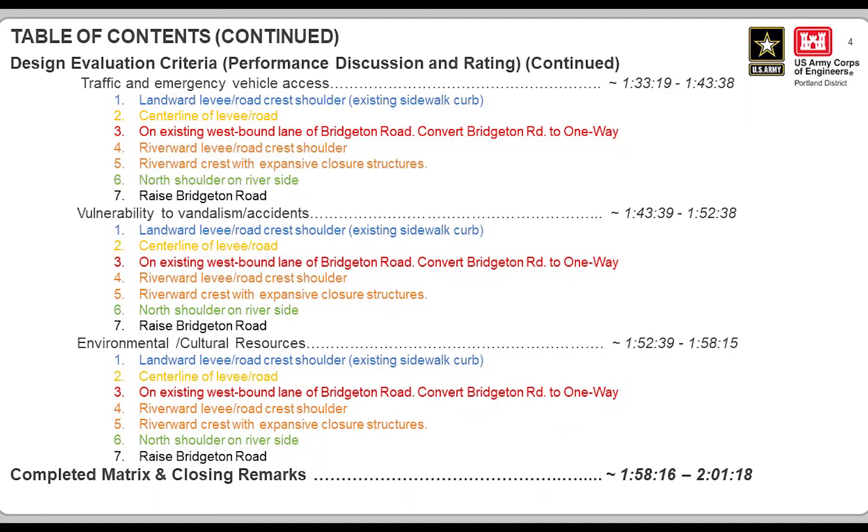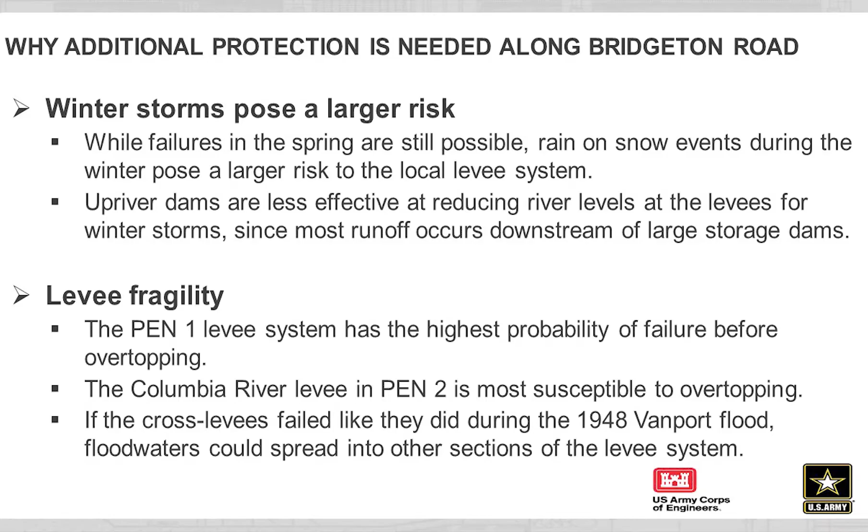Because of the social distancing restrictions we're currently all under, the Corps and MCDD are trying something different to reach out to you. We've put together this video presentation to update the public on what we've been looking at in the way of refinements to the Portland Metro Levee System alignment, specifically along Bridgeton Road.

As you know, the Portland Metro Levee System provides flood risk reduction to a leveed area with over 30,000 people living and working in the area and over $7 billion in property value.

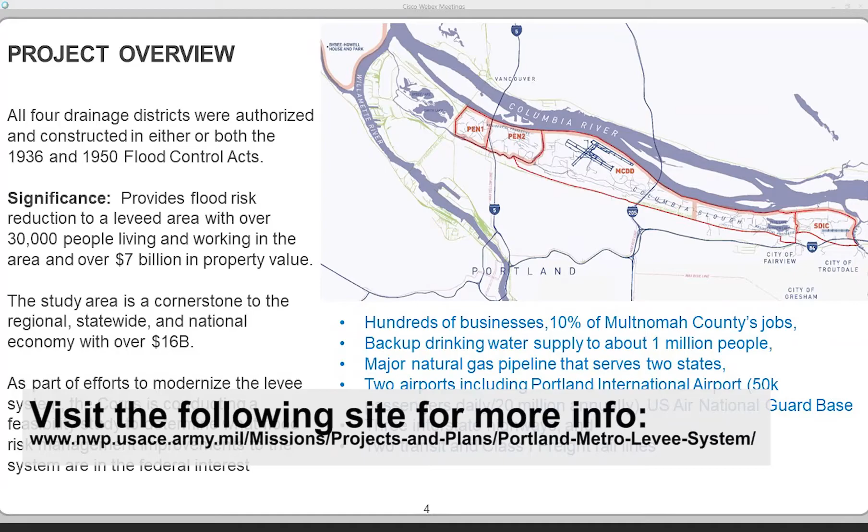As part of the effort to modernize the levee system, the Corps is conducting a feasibility study to determine what flood risk management improvements to the system are in the federal interest.

With the majority of the residents in the protected area living in Pen 2, the Bridgeton Road protection is an important feature to the residents immediately adjacent to the levee, but also very important to the residents that live in the low-lying areas of Pen 2.

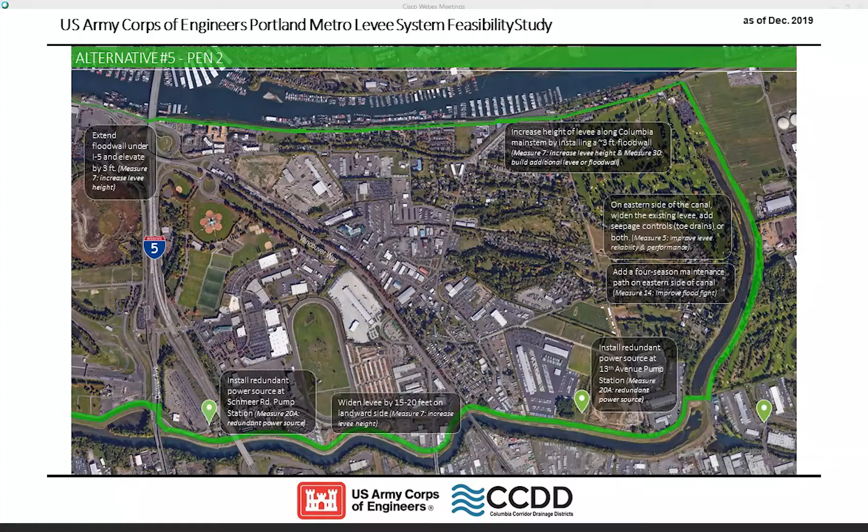To review what we've completed so far, the Corps has circulated the feasibility report and environmental assessment for public review and comment. We did that in January and early February of this year. We had identified the tentatively selected plan as Alternative 5.

On April 15, 2020, we conducted the agency decision milestone, where we received approval from our division headquarters to continue refining Alternative 5. On April 28th, the Corps and MCDD held a virtual meeting with the Bridgeton Neighborhood Association Board and committed to update the entire Bridgeton neighborhood on the refinements of the alignments along Bridgeton Road.

It was specifically requested for us to reach out prior to the Corps decision on the refined alignments.

What we'll be doing now is walking you through a meeting that will give you an idea of the alignment refinements for design options that we've developed, criteria that will assist in trade-off analysis of these various options, and they were based on the concerns that we heard during the neighborhood walks held on February 25th and March 4th, and in the public comments received on the draft report.

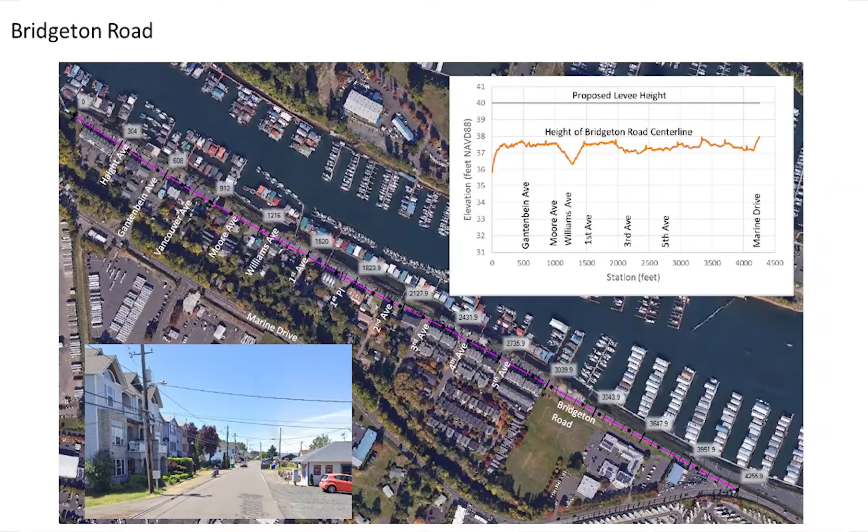First, I'm going to talk through the different options that we're going to be discussing today. There's a little bit of color coding here, but there are 7 different variations that we'll be considering.

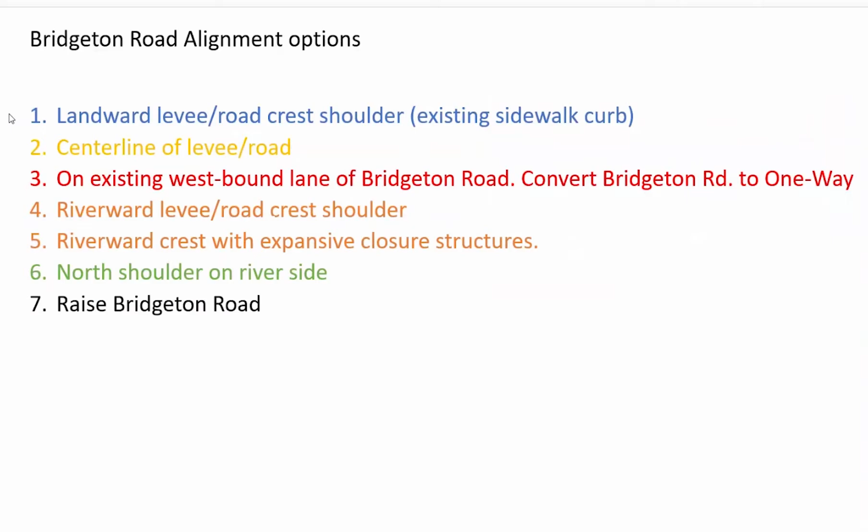A picture will help show this more clearly, but we're walking from alignment being the southernmost to the northernmost for the most part, where we have a flood wall proposed for the first 6 options. The 7th option then does not have a flood wall or closure structure, but is more of a wholesale raise to the road. We'll talk in a little more detail about these.

Here's an aerial view.

These are not detailed schematics, but for the purpose of discussion, I think they help. So in plan view, option 1, that's where there would be a flood wall with closure structures on the south side of Bridgeton Road along the curb.

When I say closure structure, that is essentially you have a permanent flood wall in most places, but you have gaps in the flood wall where we call those closure structures, because we would come in right when a high water event is forecast and fill those areas in. Most of the time these closure structures would be open, but when a flood comes, we would come in and put some steel or wood panels in there to complete the flood wall.

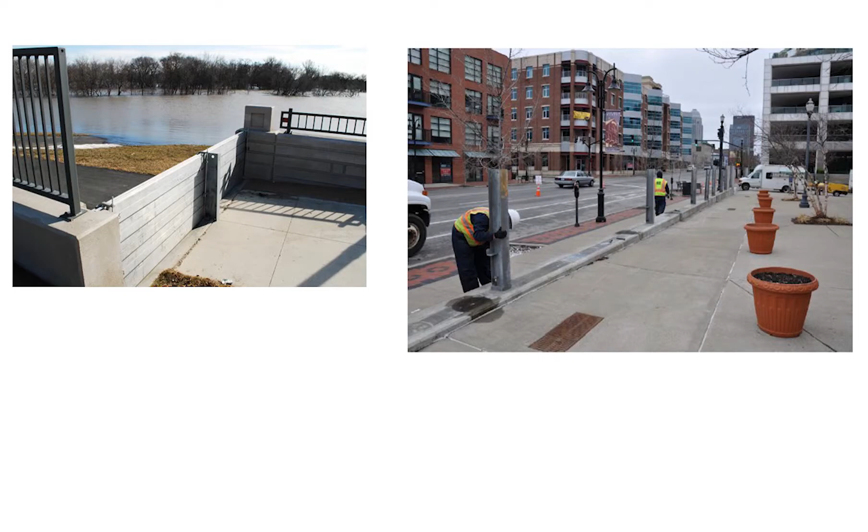There's just a couple pictures of a closure structure where you have a short flood wall here. I think this picture on the left is in Fargo, North Dakota. This area here is open most of the time. When a high water event comes, you place this structure in place.

Option 3 then is to convert Bridgeton Road to a one-way street and have a flood wall just on the existing, what is currently the westbound lane of Bridgeton Road. There would be openings, larger openings to allow for access into parking areas.

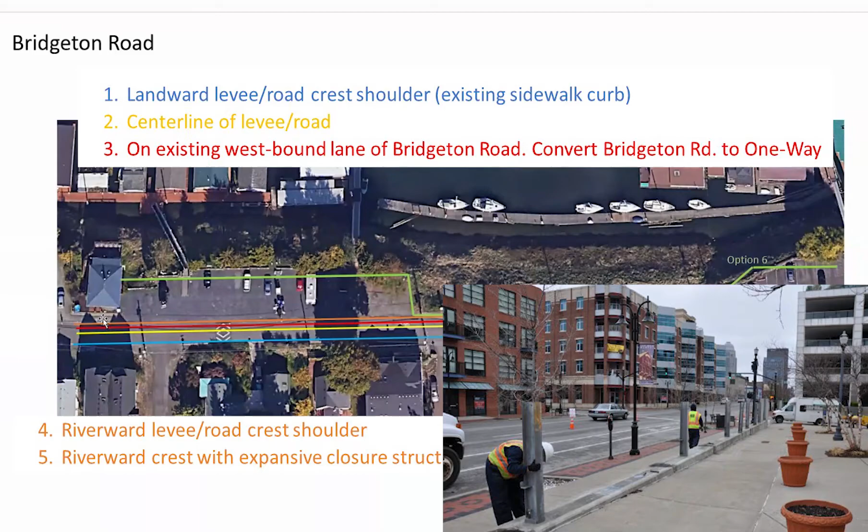Option 5 is in the same alignment, but this option we call an expansive flood wall, or an expansive closure structure, where there's actually nothing there in place except a few holes in the ground with covers on them. When a flood came along, with warning, staff would come and erect the entire closure structure for the entire length of Bridgeton Road. That's over a half mile of closure structure that would be in place.

Option 6 then is pushing out the flood wall as far north as possible. We're trying to be north of the parking area.

One thing I should note, and I think we have some cross-sections later, is that the original design levee was essentially right where Bridgeton Road is. The top of the original levee was where Bridgeton Road is. Over the years since that levee was constructed, these areas where there's currently parking and other uses and access to floating homeowners, that material has been placed after the levee was made. So we call this area the overbuild.

If you hear us talking about the overbuild, that's essentially material that was placed that makes the whole area higher elevation than it was with just the original design levee. But this material was not engineered or designed to perform as well as the levee. More to come on that overbuild as we talk through option 6 more.

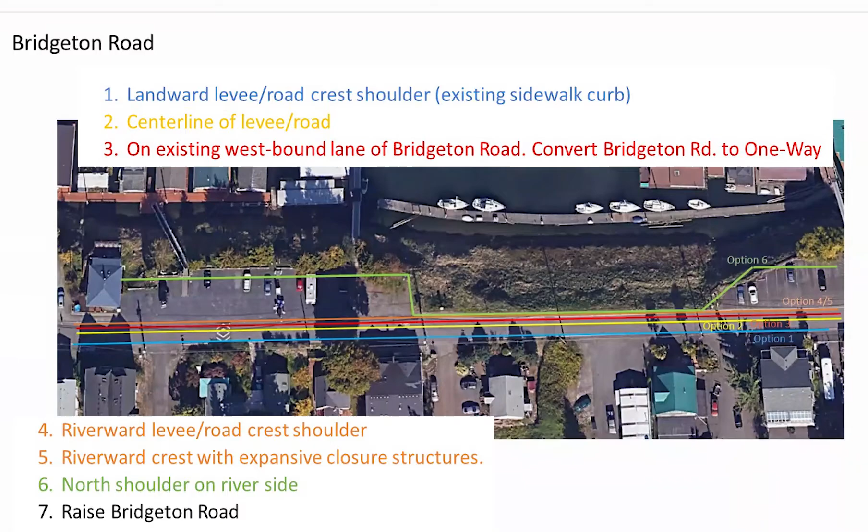So to talk through each of those a little bit more, we'll show a typical cross-section. We've been looking from an aerial view, and now we'll look at a cross-section view and show the differences between them.

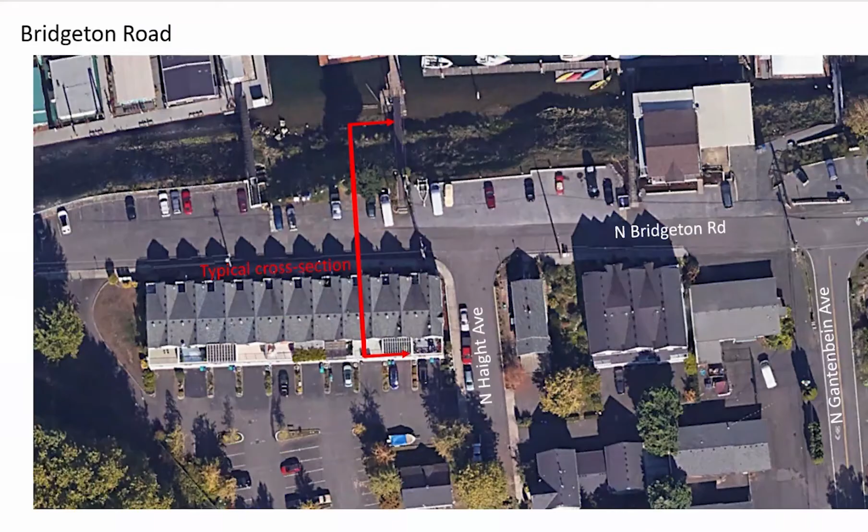So I believe that dark section is one of those houses.

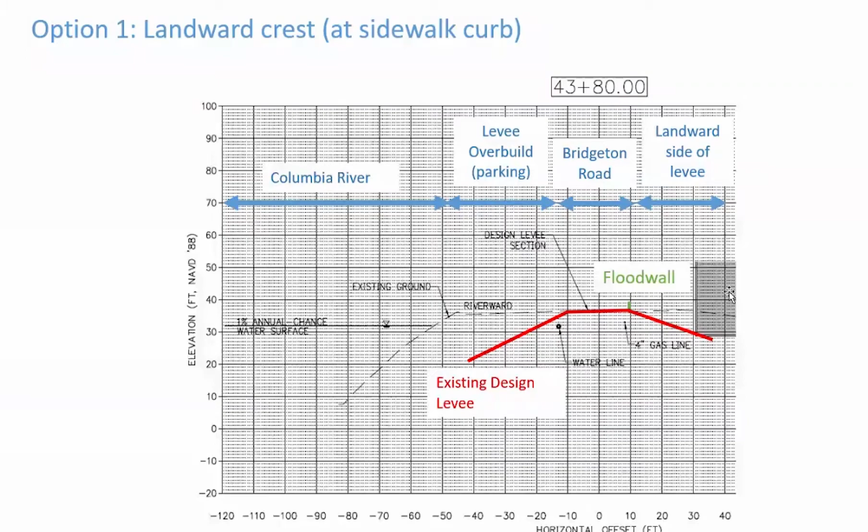Option 2, the Centerline, is essentially a flood wall, this little green stub right down the middle of Bridgeton Road.

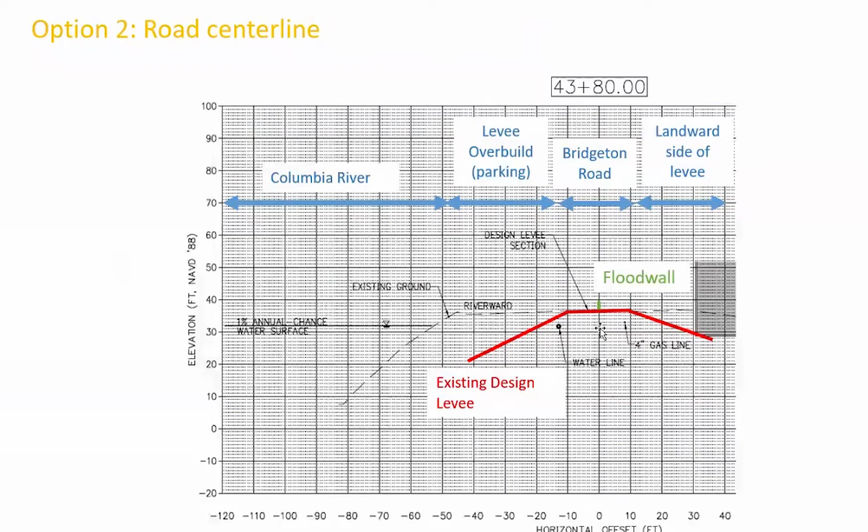Option 3, the westbound lane option, puts the flood wall right in the middle of what is currently the westbound lane. The southern lane would then be turned into a one-way street.

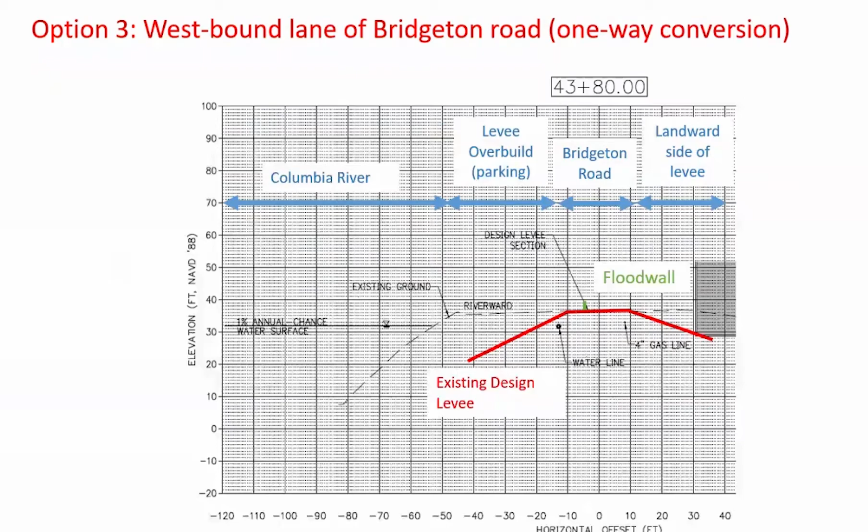Option 4 is putting it on the Riverward levee side, at the north end of Bridgeton Road. This was the option shown in the draft report.

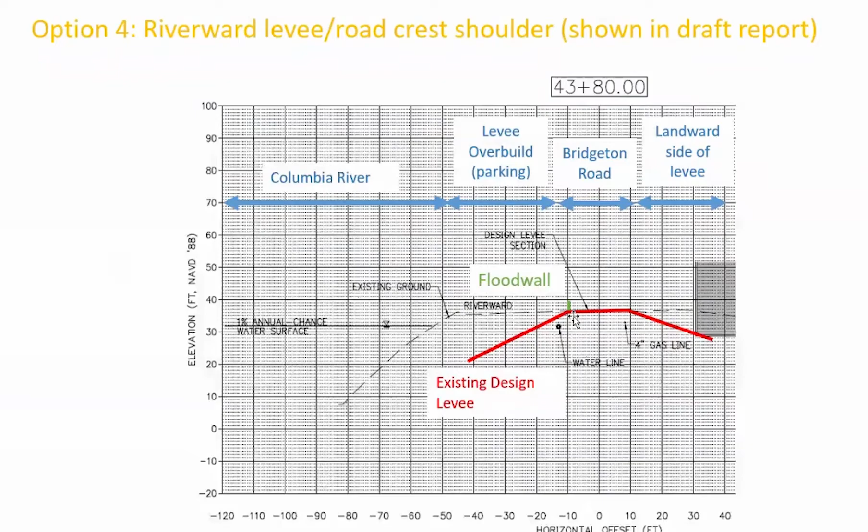Option 5 is similar, in the same location as option 4, except now it's not a flood wall and closure combination, it's a closure structure the entire way. So you don't see any flood wall, and when a high water event comes along, this closure would be erected.

Hey Ryan, can I ask you a question about that last one? This is Jeremy - the length of that closure structure, are you going to mention it now or talk about it later? Let's talk about it later, since we have a whole category on closures and how that would work for each option. Thanks. No problem.

Option 6 is a little more involved. This is a floodwall on the north shoulder of the Riverward side. If a floodwall is placed outside of what is the existing design levee, shown in orange in this slide, this red T here would be an upside-down T floodwall that would extend higher than the current overbuild, so there would be a bit of floodwall poking out.

Jeremy, anything else to add about this? The only thing I'll add, to discuss later when we talk about engineering performance, is that sheet piling shown as the green vertical line. It could be there or directly beneath the flood wall, kind of integral to it. That's something still to be determined, but keep it in mind since we'll talk about it later as an important part of this. Okay, over.

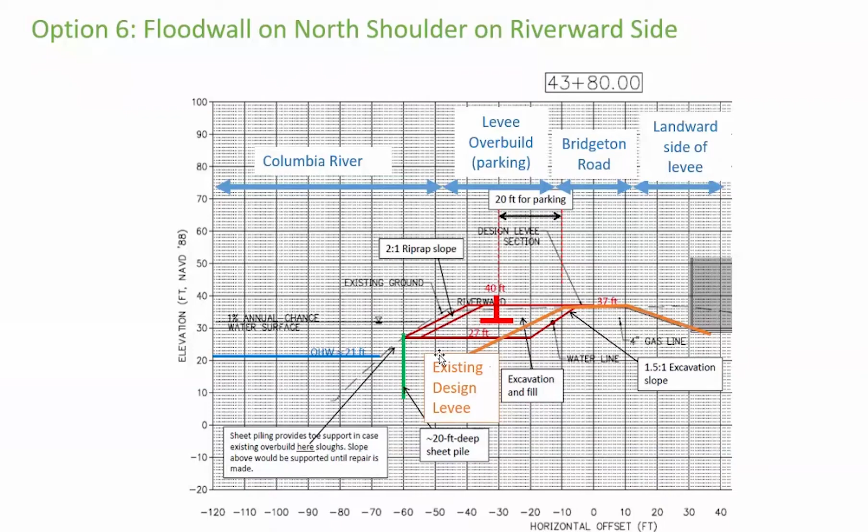The last option is the road raise option, elevating Bridgeton Road and having that slope continue downward to a spot where we can end it at the overbuild and have it still be stable.

On the land side, the sidewalks and some accesses to homes directly on the landward side of the levee would need to be modified a bit to accommodate a couple foot raise. But this is the general idea on this road raise.

Nathan, anything else to point out about this option? There would be slightly more intricate geometries required around the intersections and various driveways, but my analysis indicates it seems possible. Over, thank you.

So those were the options we're evaluating today. Next I wanted to bring up the different criteria we're going to evaluate them on.

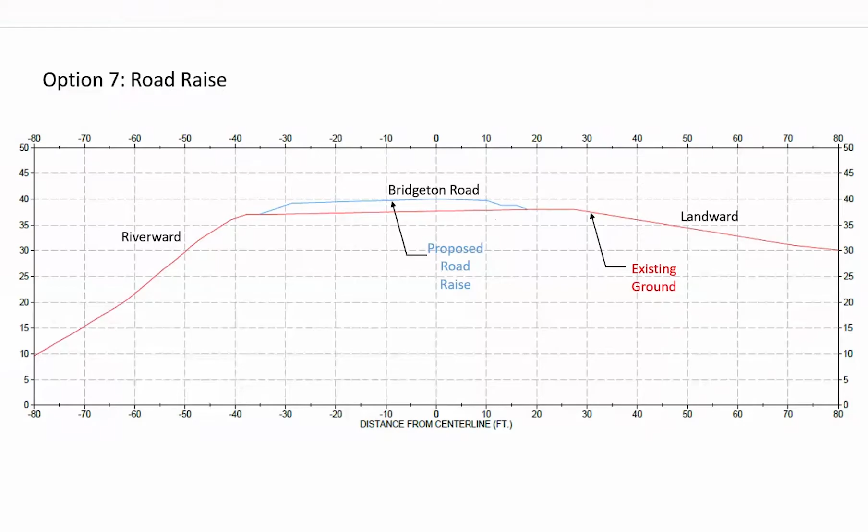The evaluation criteria includes 9 different categories, and we'll be doing a qualitative ranking, not numbers, but more of a three-point scale, like a stoplight, where green is good, yellow is fair, and red is poor performance. For each option, we'll look at these criteria and how it performs.

The primary considerations we need to look at, per the Corps of Engineers guidance in our federal process, are first a solution that provides the flood risk benefits we actually think it will - making sure the solution will actually work when there is a flood - and second, what's the lowest cost option.

So look, those are the primary considerations, but there are also a lot of other factors and considerations that have come up from our neighborhood walk and from public meetings that we know that we need to consider and address as well.

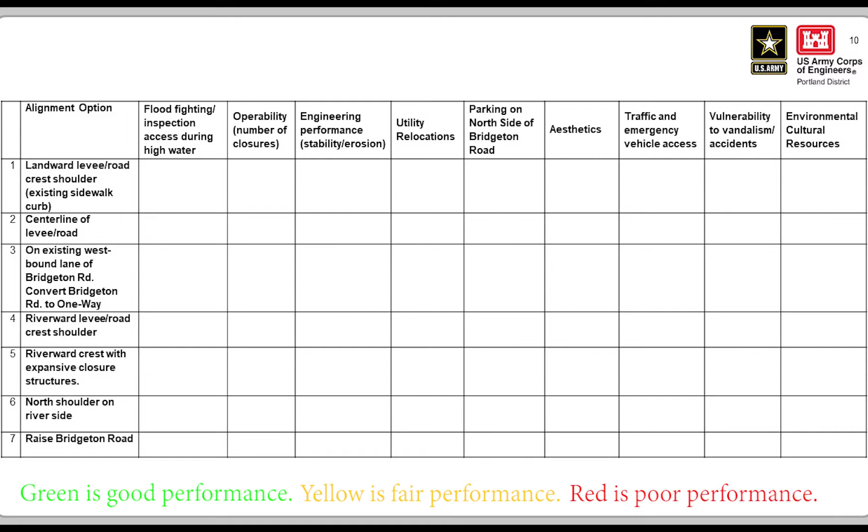Ryan, this is Valerie. I guess I have a couple of questions. Are we comparing them to each other? Are we comparing them to what was shown in the draft report? Are we only evaluating them on their own merits against the criteria? I just want to make sure we clarify how we're going to do the evaluation.

Over. Yeah, that's a good point. We are not comparing them to what was in the draft report to the public. This really is just evaluating them on their own merit.

So, for instance, in the operability category, where we're talking about closures, a rating of good would mean that we think there's really no issue at all with this option. When it comes to closures, we don't see there's no real risks or problems that come from this. Whereas a rating of red would mean that if we institute this option, the chance that it would not perform and that we wouldn't be able to operate it is relatively high. But we are looking at kind of each one as its own merit. Does that clarify? Yes, it does.

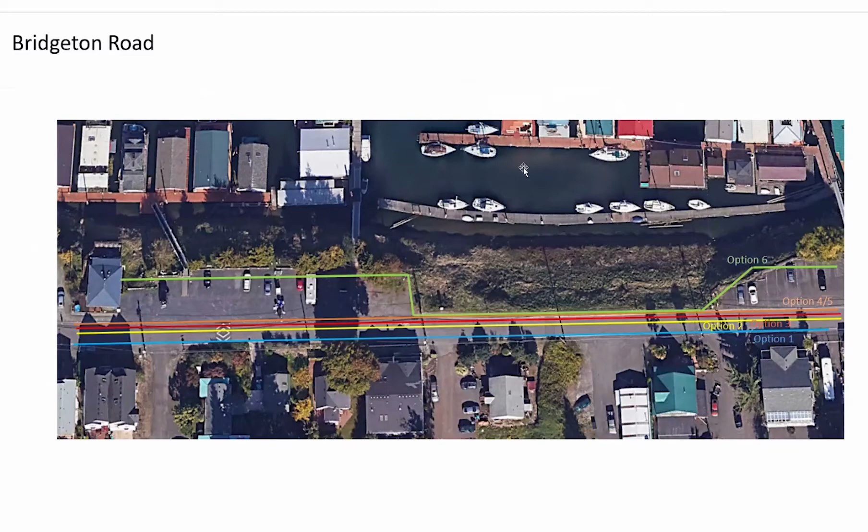Great. Thank you, Ryan. I think folks appreciate that. I think we'll get started. I'm going to stop sharing the screen and bring it back to video.

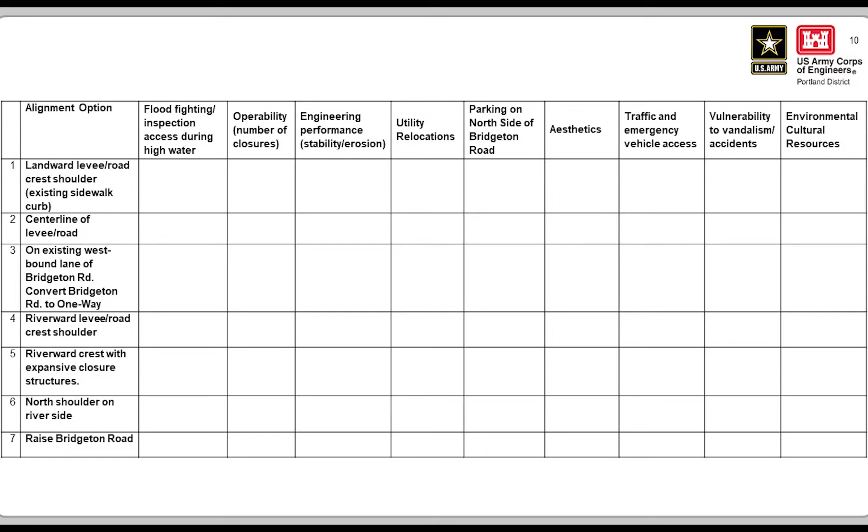But I'll be filling out this matrix as we're going along. So the first category we'll be talking about is flood fighting, our ability to access and inspect the area during high water events. And since the drainage districts are the local sponsor and they're responsible for doing this during high water, it makes sense for the drainage districts to talk through these considerations. So let's start with any overview comments you have on flood fighting or inspection access, then start working through the different options.

Okay, thanks, Ryan. I'll start with option one, which is the Landward option, and I'll probably turn at the end to my colleague Kevin in case he has some additional thoughts. But in general, as we go from Landward to Riverward, during flood fighting, there's two key essentials. One is access just for the emergency responders to be able to look at and inspect the levee.

During a flood fight, we're looking at traveling along the top of the levee, obviously looking out over the water on the other side, but looking back towards the land and seeing where water is seeping through the sand levee. It's natural that water is moving through, and our job during a flood fight is to make sure there's no areas where the water has broken through or started to seep and show signs of potential failure. So the more we can look at the backside of the levee, the full levee height, the better, for obvious reasons. So the first option is perhaps the most problematic, because we're adding more structure on the landward side, and if the levee or closure structures restrict access to the backside of the levee, that makes it more problematic to get people and equipment down there.

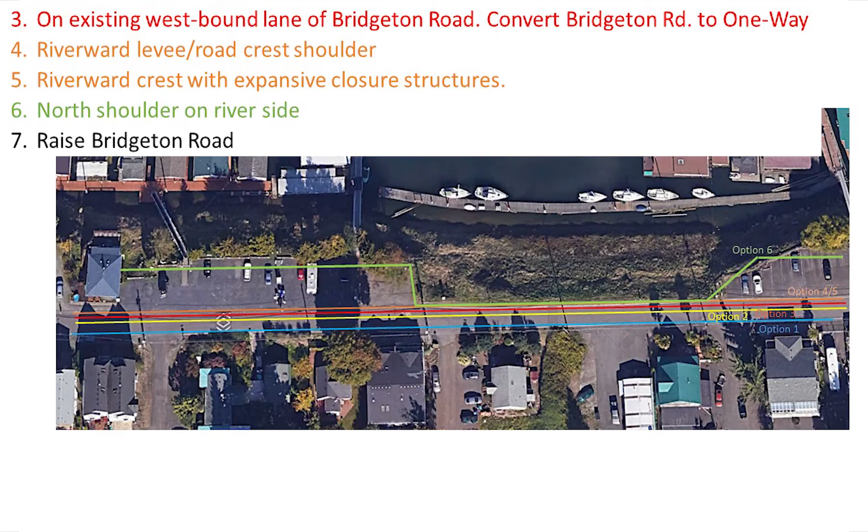Ryan, this is Valerie, I apologize, I couldn't get off mute. I just wanted to ask, is that access and the issues that Mark and Kevin were discussing, is that more related only to larger or heavy equipment, or is that really any concerns with access? I'm just trying to distinguish how they maybe get heavy equipment into flood fight versus just typical vehicle traffic.

Good point. We'll be talking about typical vehicle traffic in some of the later ones. This is really when we have a really large flood happening, do we have the ability to inspect the floodwall or levee and make any emergency repairs? So it is more about that equipment access. It also has a little bit to do with safety, and patrol vehicles will basically be pickup trucks, and they'll need unimpeded flow. But if it reduces to a single lane, that's not a big deal for the patrol vehicles.

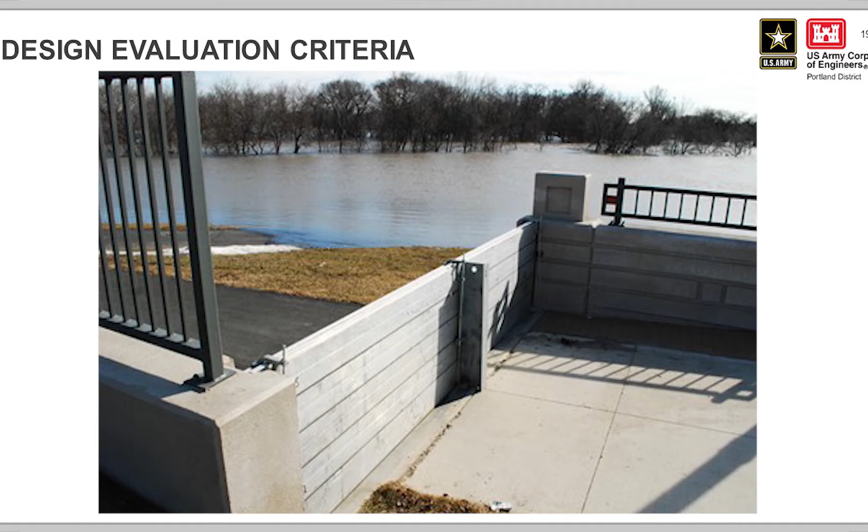So when we think about closure structures, the operability, the primary thing is whether there's enough time and enough labor to construct the closure and fill it in before floods come. From what we've seen, the primary types of floods we're defending against, when we're talking about extreme events, it's mostly a wintertime event, something along the lines of the February 1996 flood, but just larger. And those types of events, we have some warning.

We went back and looked at what the Weather Service, the River Forecast Center, actually issued for their forecasts for the 1996 event. And what we see is that there's some advance warning of this, but it's not weeks and weeks of warning, it's more on the order of days.

From that 96 flood, we essentially had 2 to 3 days of warning that this was really going to be a large flood, so it's not an extremely long amount of time. Spring snowmelt floods like 1948 give a little more warning—you can see them coming, it's a more gradual rise. So that's not quite as critical for operability or closures. It's these winter kind of short, fast-moving events that are more challenging.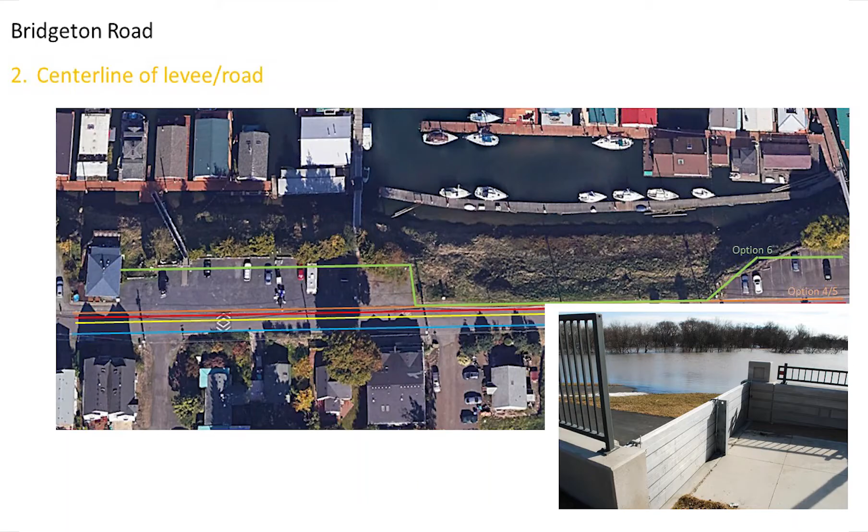Right now in the whole Portland Metro levee system, there's only a few closures throughout—I think about 6 or 8 for the whole system. There's a floodwall up in Penn 1, and a few others. This option would be essentially close to doubling that, which is going to be much more challenging, and there would need to be exercises of these closures as well. So with the center line of the levee and road, there's less, and that does seem doable, but it's still not a slam dunk. I'd probably put that as fair as well.

Similar case for number 3, the westbound lane option where Bridgeton is converted to a one-way—essentially a similar number of closures. You don't have closures for the cross streets, but now you have closures for all the parking areas to get in and out. So that one is fairly similar—probably rate that one about fair.

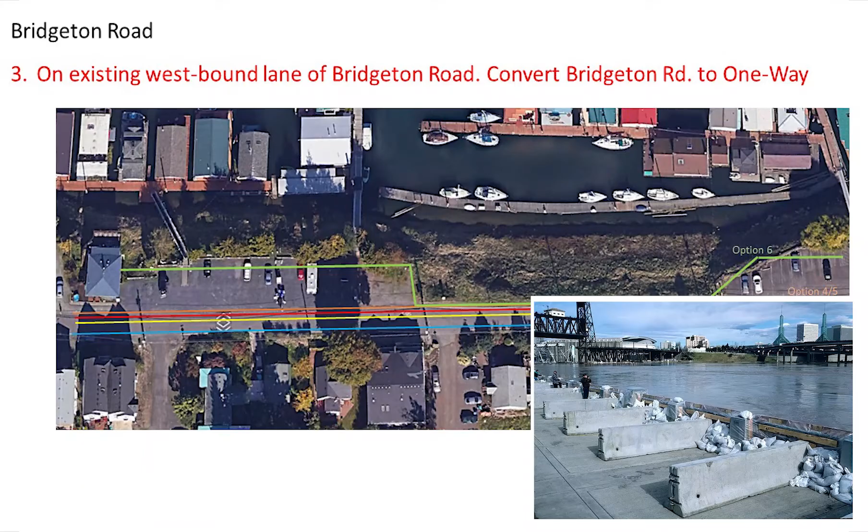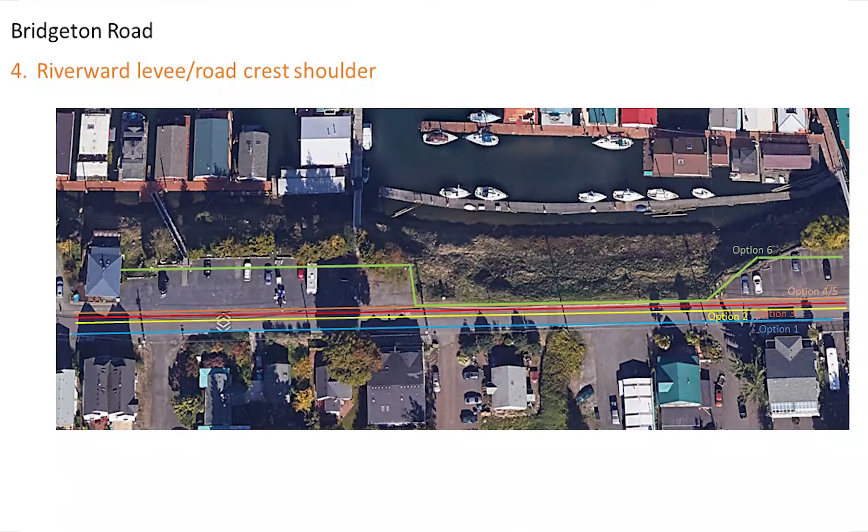Option 4 is on the riverward side of the levee, the north side of Bridgeton Road. That was what was shown in the draft report, and to accommodate and not block off access to the boat ramps and parking areas, that's going to require quite a lot of closure structures—essentially analogous to the number in option 1, though all a little different in size. That's going to require a lot of closure structures and would not have fully reliable performance there. I would rate that one poor because there are a lot of closures there.

The fifth one probably requires the most discussion. This is the riverward crest with—it's the pure closure structure option. So this is the option where there's essentially no flood wall at all, just a closure structure.

There are some closures like this throughout the country. We did research on other areas nationwide where the Corps has done levee improvements. There's actually a national levee database that the Corps maintains of all the levees in the nation, and we looked at where we have the longest closure structures—is what we're proposing here really out of the ordinary? From what we saw, the answer is yes. This would be, if not the longest closure structure in the nation for a Corps levee, among the very top, because we'd be looking at over 3,000 feet of closure.

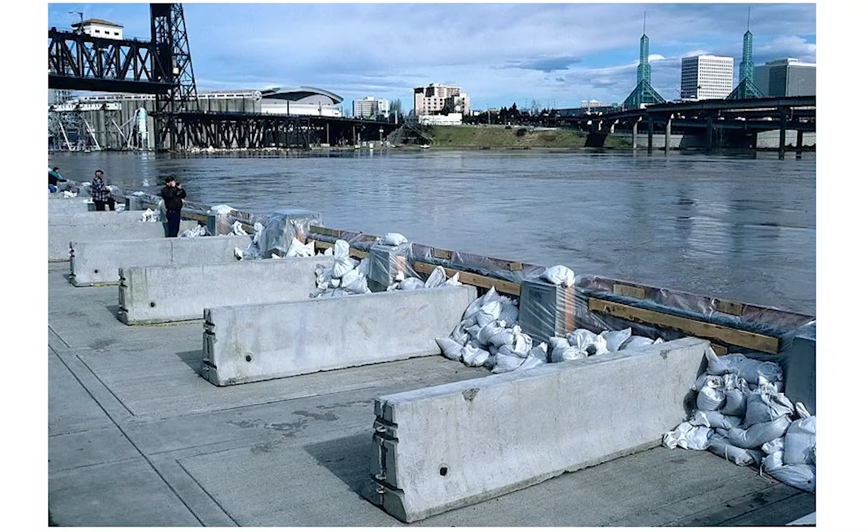So that's another risk of this, is there's a lot of pieces that are needed for this. Keeping those maintained straight is a challenge. Jeremy, I don't know if you had any other thoughts on this option.

Yeah, thanks, Ryan. This is Jeremy. I think it's a challenge, this option, for the reasons you mentioned. It takes a lot of people and a lot of equipment to install this long closure. So it's really labor and equipment intensive, and we've been committing a lot of energy to installing this thing. At the same time, there are a lot of other things happening. A flood is coming, and there are other things to be done in the system, and this would take a lot of energy to do this. So I think that's an issue with it as well.

Before we start talking about the engineering performance for all of these, I just wanted to kind of remind folks about the cross-section that Ryan showed, where we have the design levee section, which is what we consider to be the levee, and then there's the overbuild material, which is on the riverward side, and it's material that's been placed over time for things like parking and other things. And we don't know as much about that material. We don't know how well it was compacted, if at all.

When the sponsor hired an AE firm, an engineering firm, to do some exploration, to drill some holes into the levee for the recent assessment, they drilled holes in the levee down the centerline, and then at the toes of the levee, kind of on the landward toe and then on the riverward toe. But there weren't any holes drilled in that overbuild, because that's not really part of the levee, so there was no real reason to explore that material. So we don't really know as much about it.

We do have some experience with it over time. There have been incidents of that material sloughing, which is kind of like shallow sliding down into the river. So that's just an observation about that overbuild material. That's a little bit of context.

Moving to the other ones, I think maybe I'll talk about options 2, 3, and 4 all together. For these, the wall is moving farther to the north, away from that shoulder and that slope, so now there's more land or ground on the landward side of the wall to support it. I think those are kind of normal places where we put flood walls, down the centerline of a levee or on the riverward side. So I think option 2, centerline of Levee Road, that's good on the existing westbound lane. Option 3, I think that's also good. And option 4 is also good.

Are there any comments on those three?

Okay, so moving to option 5, this is the expansive closure structure option. I think for this one, we already talked about operability, that's getting the closure constructed and getting it in place. So I think we have to assume that that's happened, and now it's just what's the engineering performance of the wall, the closure in place. This one, if it's all put together properly and everything's perfect, it could be good.

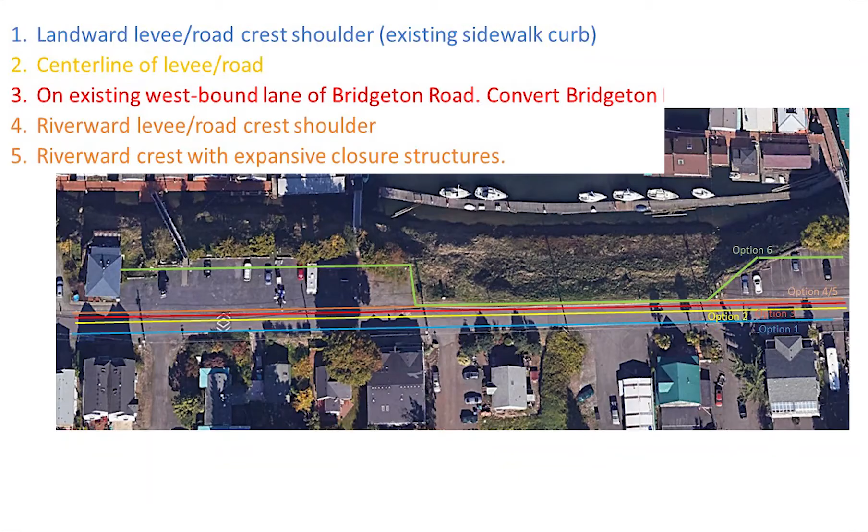The expansive closure structures would be the same, because even though the surface would look different - since we wouldn't have a permanent flood wall, we would have a closure structure that we erect in times of need - the underground portion of that would be the same. We would still need the sheet piles for cutoff, so we're still having to deal with all of those utilities that run through there, either realigning, doing penetrations through, or running a separate main so that we have a main on either side of the wall. Those are your options. So that would be the same for option 5.

For the north shoulder on the Riverward side, option 6, things are a little bit better for a number of reasons. One is that the utilities are generally deeper as you move towards the river, because they're underground and going down the levee, so there's a possibility we'd have fewer conflicts. Also, as you get towards the houseboats, a lot of the utilities collect and run down on the surface, down the ramps that lead to the docks, so those would be easier to handle once they're more in a centralized location. And some of the bigger storm sewers are potentially impacted when we're talking at the top of the levee crest, but we expect them to be well below where even the sheet pile wall would extend when you get out into the overbuild quite a ways. So because of those items, I would recommend option 6 being fair when it comes to utilities. There would still definitely be impacts, but at this point it's seemingly fewer impacts than options 1 through 5.

Option 7, the raise of the road, I would also rate as good. That option basically included a raise of the road, but also a raise of the parking area. A lot of the parking areas would be shortened because depending on the amount of feet of raise the road undergoes, we would need to slope down at the riverward edge to meet the existing grade of the overbuild. But for most locations it would just be a reduction of a couple of feet, so the parking space would be shortened, and a couple of the double spots might be shortened to a single spot. On the whole, it would have very little impact to the amount of parking available, so I would rate that as good as well.

Any questions? All right, next is aesthetics, kind of the visual and feel of this. We'll turn it over to the local sponsor of the drainage district. They are most in tune with the area.

I'm Brian. When it comes to aesthetics, there's a couple things to consider. One important consideration is that in some cases there will be permanent structures in place, and in some cases temporary closure structures. We haven't arrived at any decisions, but some of these have more or less visual impact. Once we get into the true design phase and figure out which alternative we're narrowing in on, there are things we can do as local partners to try to further enhance the aesthetics to a limited extent. Some of these options do address aesthetics or don't really have a consequence except during high water periods, so I'll talk a little bit about that.

All right, all right, we're getting there. Let me flash up the matrix as it stands right now.

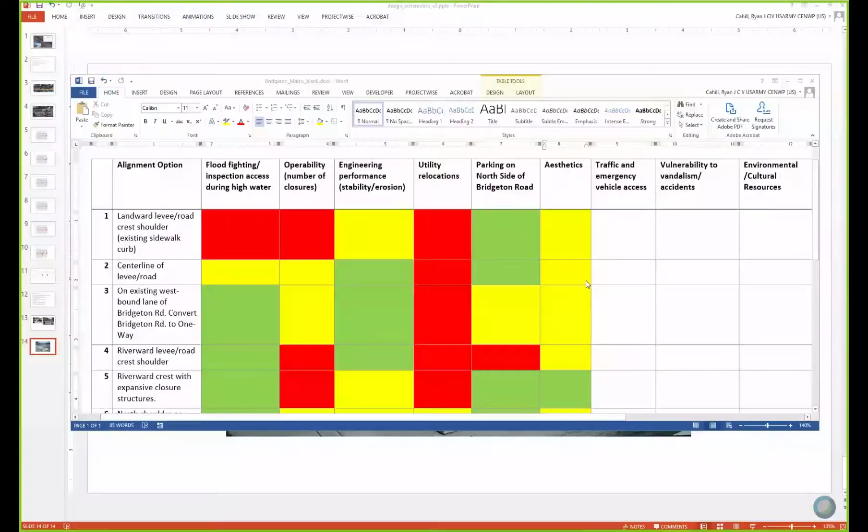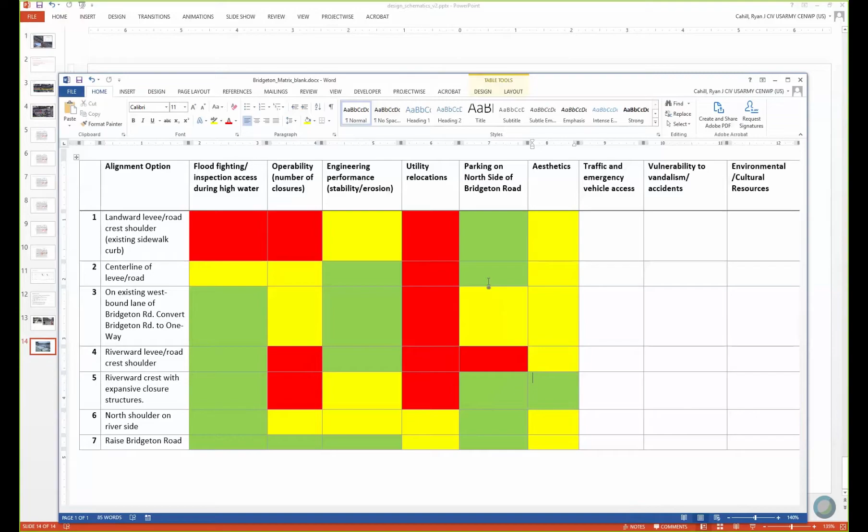All right, let's move on to traffic and emergency vehicle access impacts. We did hear from residents in some of the public meetings that emergency vehicle access was a concern for some of these options, so we wanted to make sure we evaluate that. I'll turn it over to Nathan to talk through this category.

Thank you, Ryan. Looking at traffic patterns and emergency vehicle access in the Bridgeton neighborhood, we're talking about the use of the road as a road, and also the ability to get large vehicles, primarily ambulances and fire trucks, into that area if needed. Any other type of large vehicles for other emergencies was kind of discussed with the flood fighting aspect of it.

For option 1, the Landward levee crest floodwall, I don't believe there would be any impacts to traffic patterns or emergency vehicle access. There would be openings and closure structures at the intersections, but those would be open most of the time, and the closure structures would be large enough so there would be no impacts to the turning radius, the swept path of the larger fire trucks and those types of vehicles. So I think that would be rated as good.

Alignment option number 2, the center line of the Levee Road - this is probably going to be poor. By putting a flood wall in the middle of Bridgeton Road, basically making 2 narrow lanes that do not communicate with one another, that would likely lead to disruption of emergency vehicle access to that area because they wouldn't be large enough for the larger vehicles to traverse.

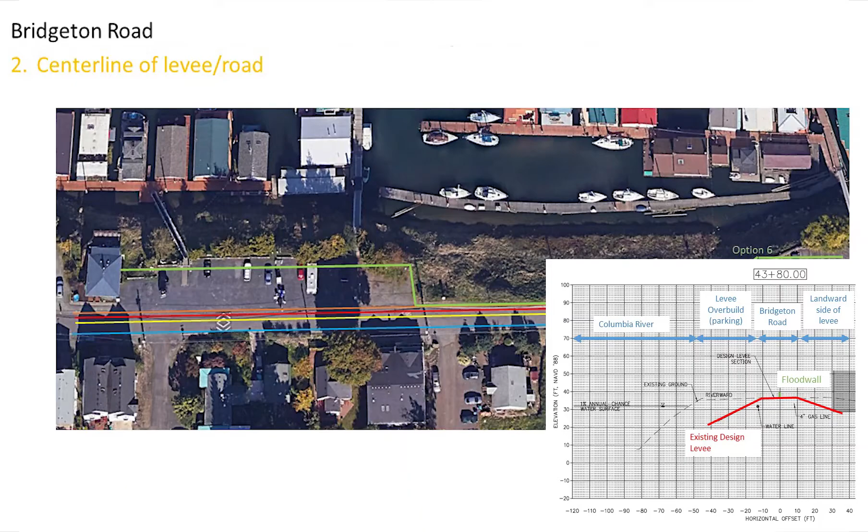It would also, as far as just traffic goes, lead to some odd situations for residents as the openings in the wall would likely only occur at intersections. So in order to get to your house, driveway, or parking spot, it would probably require a lot of driving past and then doing a U-turn and going back in, which would be cumbersome. It wouldn't be the end of the world, but I'm sure they'd prefer not to.

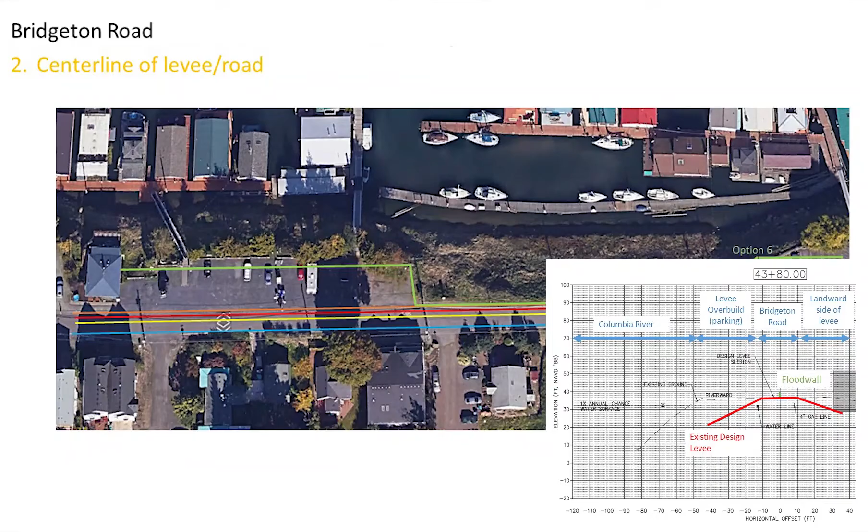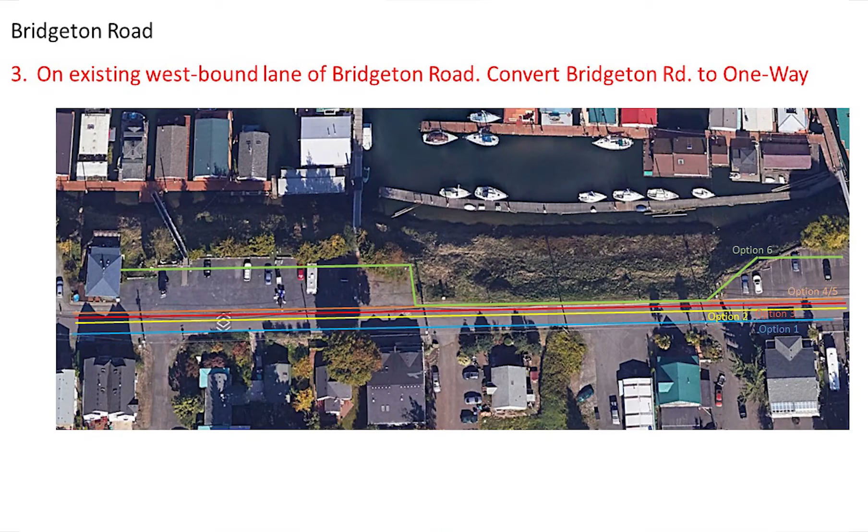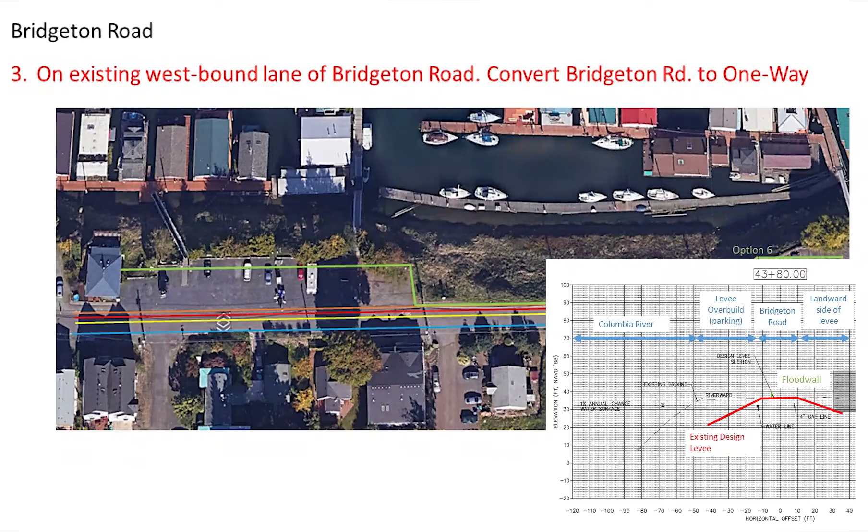Option 3, which is basically putting it in the existing westbound lane - I would also label as poor, not necessarily because the lane wouldn't be large enough for emergency vehicle access, but for the most part the problem would be the one-way traffic that would necessarily incur. If you live on Bridgeton Road, you would always have to leave going one way and then turn around and go the other, which makes for complicated traffic patterns and disruption of traffic not only on Bridgeton Road but also in the side streets, with a lot more traffic on all of the various side streets. So that's kind of a poor, or maybe poor to fair, because it's more of a livability thing versus a life safety thing.

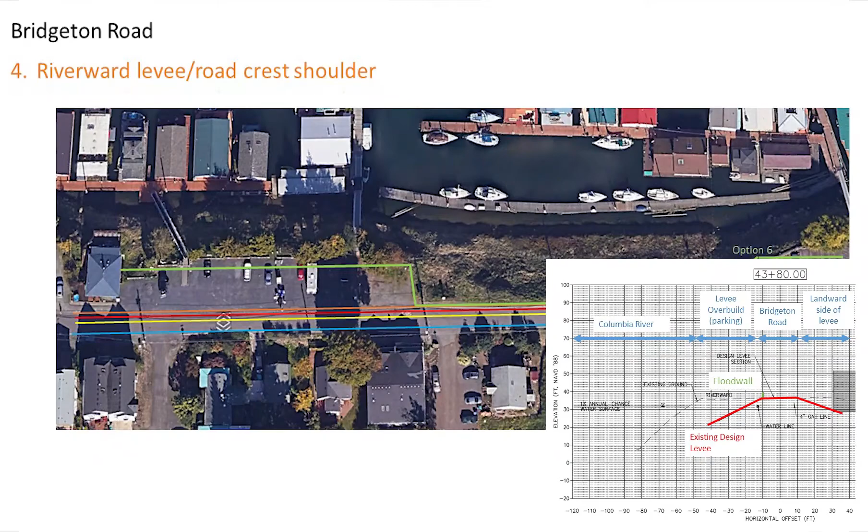On the Riverward Levee crest, option 4, I think that's the same as option 1, really. It shouldn't have any impact to the traffic patterns. People can still drive on the road as they do now, and emergency vehicles can still drive on the road in the manner they do now, so I would say that's good.

Option 5, with the expansive closure structures, again that's very little change from the current condition, so I would say it would be good. Option 6, which is the north shoulder - the flood wall is so far removed in most locations from the traffic flow that it shouldn't have any impact, really, on vehicle traffic in the area, so I would rate that as good as well.

And option 7, the road raise - there appears to be sufficient amount of space available for the road to maintain its current width, so for 2-lane traffic. I would rate that as good because it does not change the traffic patterns at all. If in further investigation of that option it becomes necessary to reduce the road to one-way traffic due to narrowness of the roadway, then that would be reduced to fair probably. But as it currently stands, I would say the road raise option would be good because it would maintain the existing condition. Over.

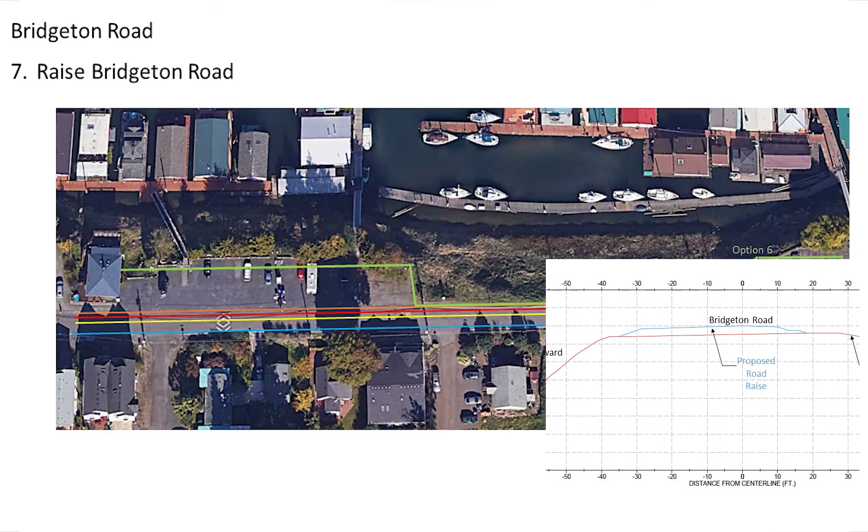I'm going to go ahead and say no. I'd like to preface that by saying we are currently in the feasibility level of design, but when the option is chosen and we start developing the design to a more advanced state, we will be complying with all requirements, recommendations, laws and regulations for those types of things. So I'm operating under the presumption that the intersections and sidewalks would be ADA compliant, and that closure structures would be wide enough to fit any emergency services, such as a gurney, that would be required.

I can see a scenario where the ambulance would be parked on the street versus in the parking area, depending on where the closure structures are, but there would be plenty of access for all the equipment necessary to get to that person. That wouldn't be restricting us. We would make sure to design that out, I guess is what I should say. Over. Okay, thank you.

Moving on to the vulnerability to vandalism or accident. I think I'll hand it over to Jeremy to speak to this one.

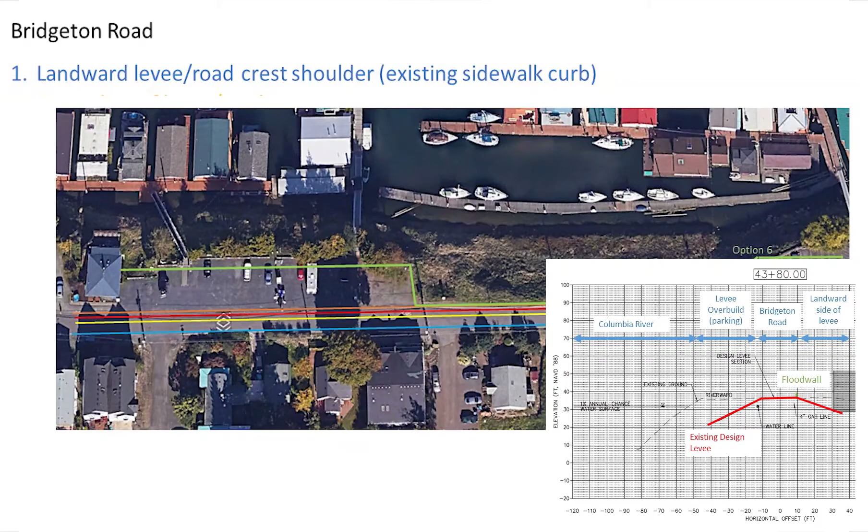There aren't as many - it's less likely you'll hit the wall here than on the north side, where there's a lot more pulling in and out of parking spaces. So I suggest we rate this one good.

Moving to the next ones, and kind of like I did for engineering performance, I'm going to lump 2, 3, and 4 together. While it's good to have the flood wall toward the riverward shoulder of the levee for engineering performance, having the flood wall down the middle of the road, or to the north a little bit, is kind of bad for traffic. If it's right down the center of the road, it's likely to be hit by vehicular traffic at some point and potentially damage the wall. So I think number 2 is poor for that reason.

Number 3, where there's the one lane option, probably poor for this one too. The wall could be hit, and there's going to be a lot of times when cars and trucks are pulling in and out of all that parking on the north side. So a lot of opportunities to hit the wall when they're going through those closure structure openings. So I think for that reason, 3 and 4 are probably poor.

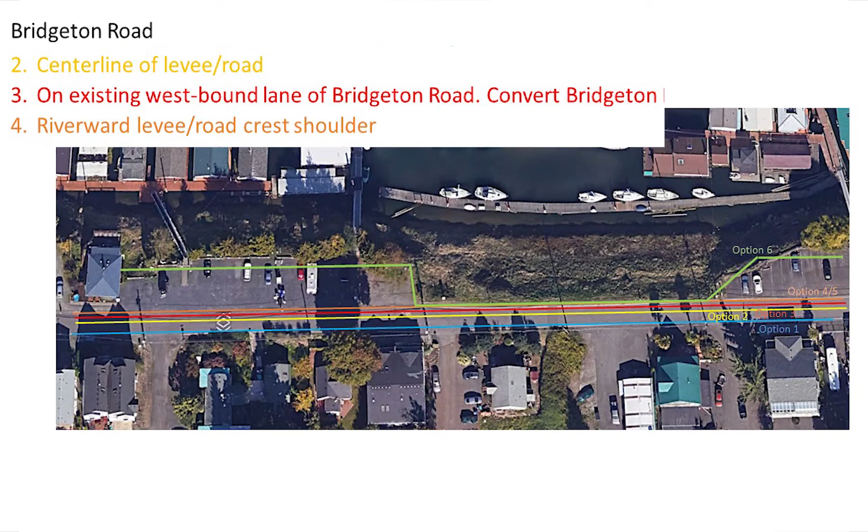For the parking, people pulling in and out of there, there's a lot of good chances of hitting that wall when going through those closure structures. So I think 2, 3, and 4, I would say, are poor.

Number 5, the Riverward crest, the expansive closure structures. Now, because it's mostly open all the time, there's not really anything to hit, which is good.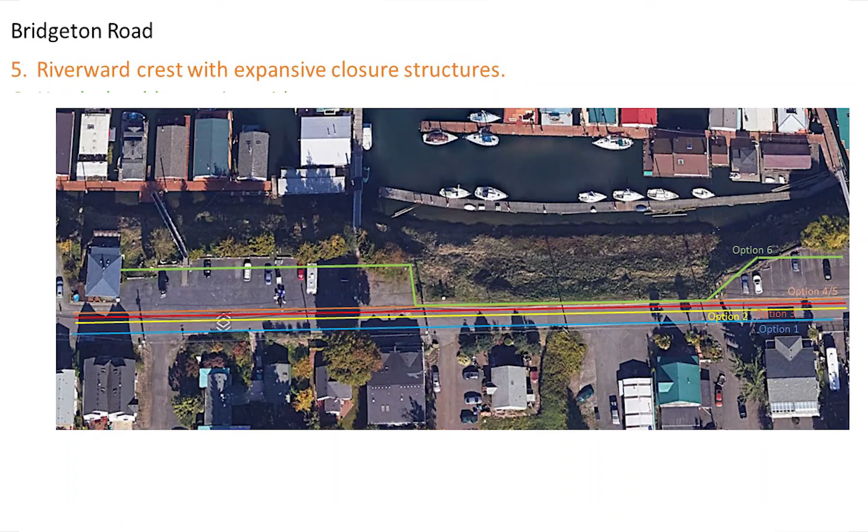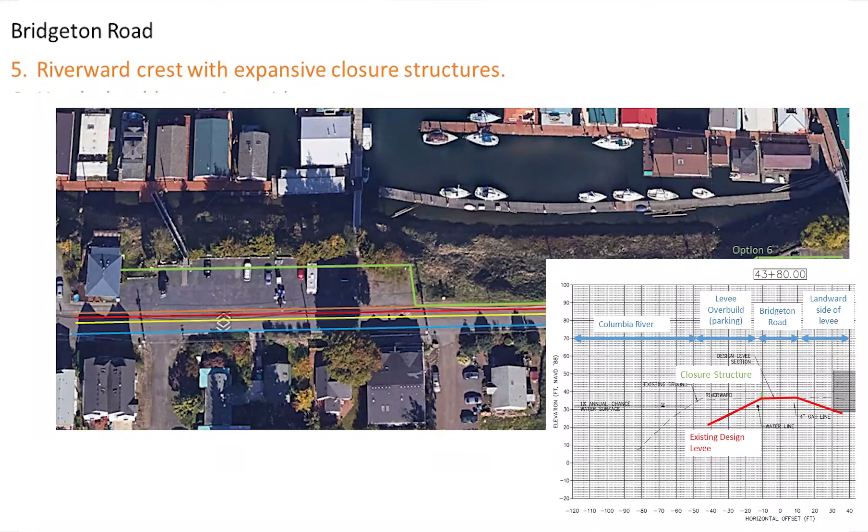There's another set of issues. There are going to be holes in the ground where posts will be placed when it's time to set up the closure structure. And there's an opportunity for those holes to get filled with earth material or junk, or somebody forgets what it's there for and fills it in by accident. So there's a chance those holes that are critically important for setting up the closure could get disturbed. I think that's something that can be monitored and watched for, and probably mitigated to a large extent. Maybe we'll just call that one fair. It doesn't really seem to rise to the poor level in my mind, so I think that one's probably fair.

Number 6, the floodwall on the north shoulder on the riverside. There won't be any cars driving parallel to the wall because this is on the northern shoulder of the overbuild. Maybe this one would just be fair because there's a potential for cars parking, either forward or backing in, to hit the wall when they're parking. That happens from time to time, people hit things when they're parking, especially when backing in, so there's a potential for the wall to be hit during parking. So maybe that one's fair.

And then I think the last one, raising Bridgeton Road, number 7, that option is rated good. There's nothing to hit there, it's just a road. Are there any questions or comments about those suggested ratings?

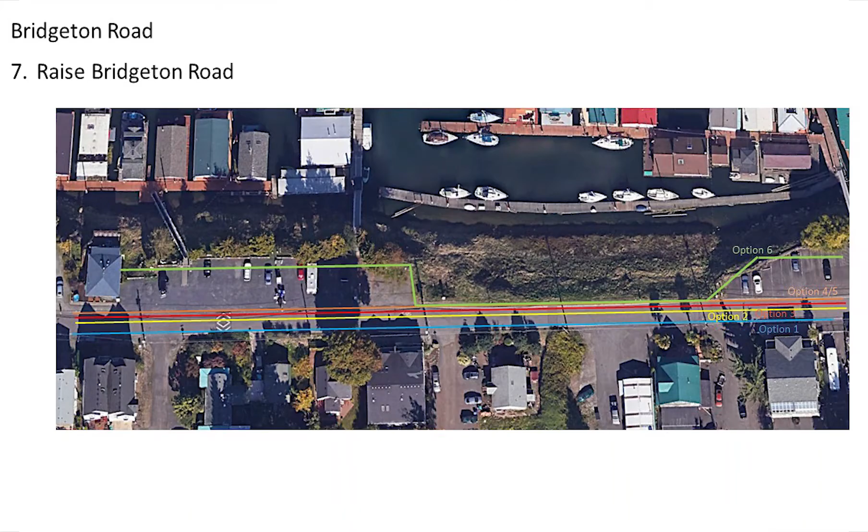Jeremy, I know this is Valerie. This is a detail maybe, but I understand the rating with someone maybe backing in and hitting the wall accidentally, but is an option to put in those kind of poles or whatever that would prevent someone from damaging the wall by hitting it? In other words, are there some design features we could add that would take care of that issue? Over.

That's a good point, Val, that's a great point. So like number 6, where the wall is on the northern shoulder, there could be things installed to prevent people from hitting the wall. I agree with that. That may make the parking length a little bit shorter, so there might be a small trade-off, but also maybe not. That's something we could look at, and there's the potential for that rating to change, maybe to good over time, if we were to look at something like that.

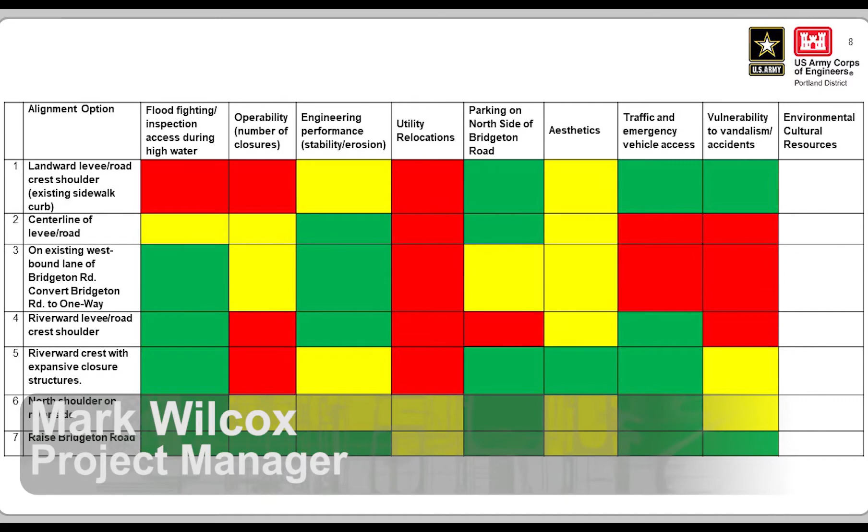This is Mark, and I wanted to pipe in that all your observations are pretty astute. When we get into the design process, there's a lot of standards out there that account for some of these concerns, as far as sight distance and turning radiuses and things like that. So we're not starting from scratch when we get to that point with any of these options in terms of trying to mitigate some of the concerns. Obviously some are way better than others, but there's a lot of standards out there, and I'm sure the design team would move forward with common best practices. So, something to keep in mind.

Thanks, good points, Mark. Thank you. I agree. Okay.

So here is our matrix as it stands. Almost there, we got one more. The final category is the environmental or cultural resource considerations there. So we'll walk through those options. I'll ask Omar Ortiz, our environmental specialist on the project, to talk about these. I'll hand it over to you, Omar.

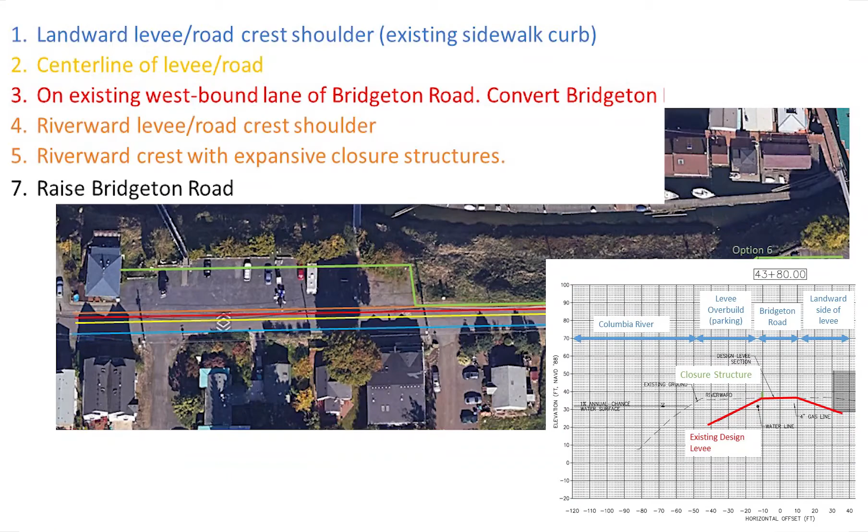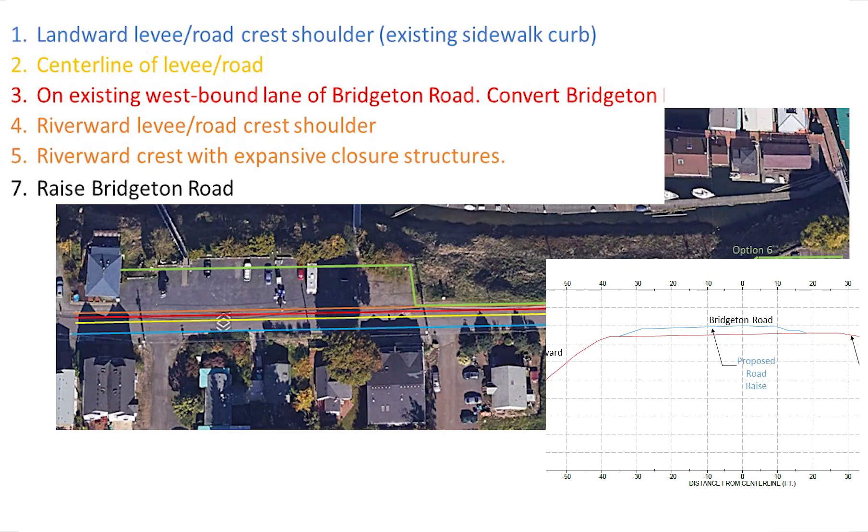Yeah, this is Omar Ortiz, the environmental resource specialist on the project. There were a couple of environmental concerns that apply to the Bridgeton area and alignment options. One is to avoid impacts to the Riverward side of the levee system, the reason being you want to avoid the aquatic habitat of endangered fish, salmonids, and the critical habitat. The other part would be to avoid and minimize addition of impervious surface materials, to minimize the increase of water quality or water quantity issues being conveyed downstream.

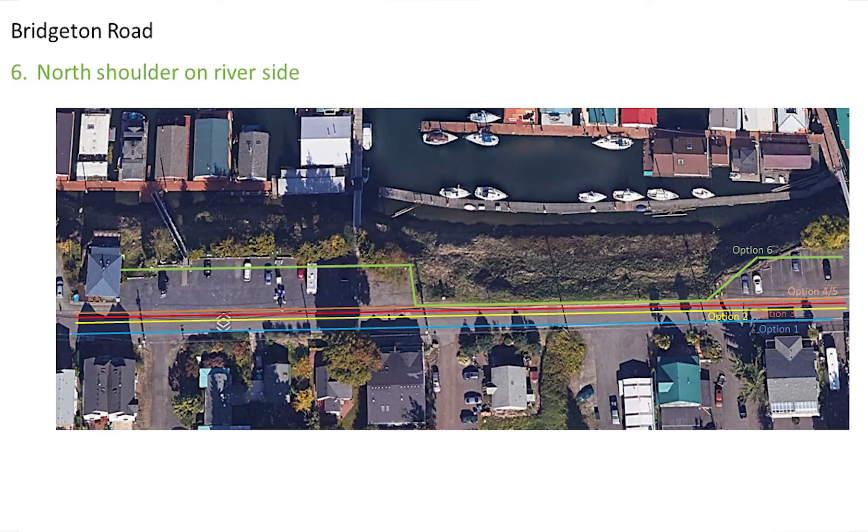Overall, all these measures I think are pretty good. They really don't have any impacts to impervious surface areas, they're really minimal. The only one that has an impact is number 6, the additional work on the Riverward side, which has some placement of riprap and sheet pile. But those impacts are even minimal because they are above the ordinary high water mark of the Columbia River. So really, I rate them all good down the entire column, except for number 6, which would probably be good to fair. Any questions?

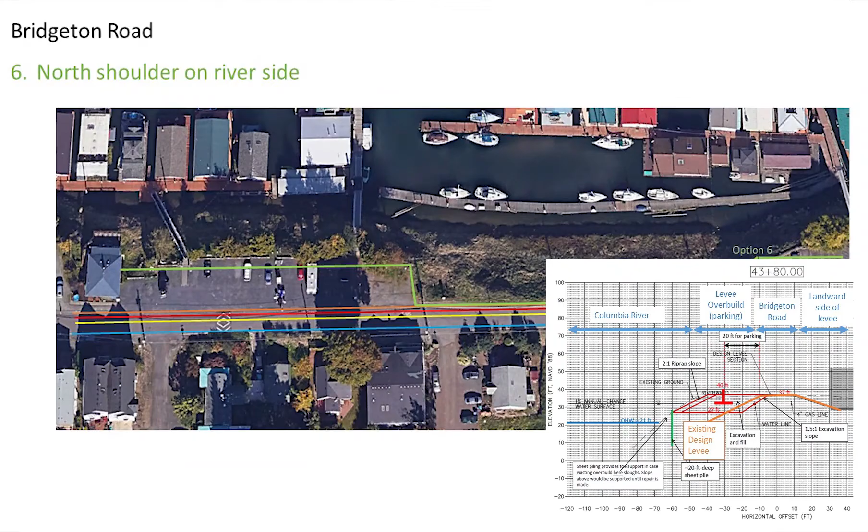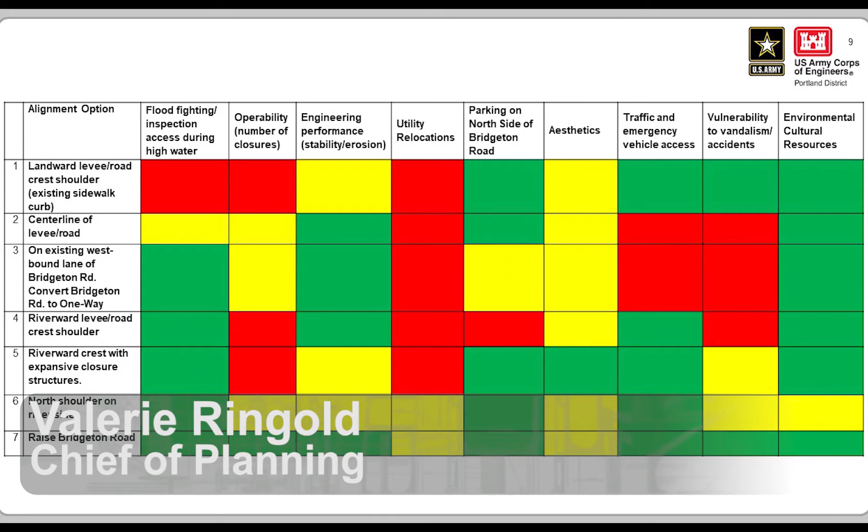This is Valerie. Maybe just a question or clarification: is there anything you've heard from the resource agencies that would make consultation or coordination with them more difficult for one option compared to the other, or are they similar enough that there's no distinction? Over.

I think there'd be some concern from the resource agencies on option number 6 because of the riprap placement and the sheet pile placement. That would be the only one of concern. It would still be something they could work with if it was the only option available, but we have other good options we're considering as well.

Overall, I think the impacts are relatively the same from that perspective. Sorry, I was just going to ask, so would there be any difference in cost as a result of needing to do mitigation or something related to a reasonable and prudent alternative or measure under the Endangered Species Act?